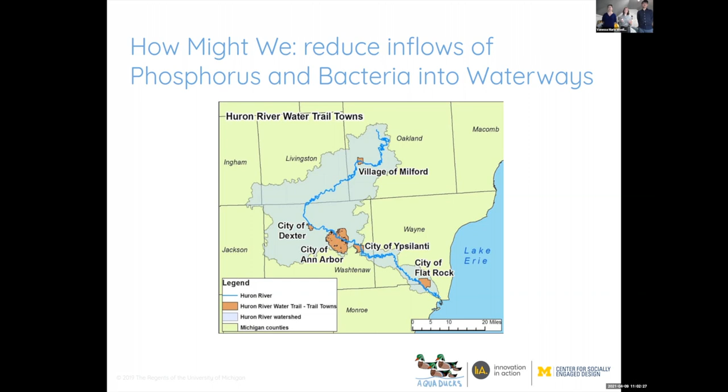Continuing to speak with our stakeholders, livery workers think the water is contaminated because they frequently have to shut down the business. Rowers don't want to be on the water if it isn't clean because they're on it so often, and it inhibits other recreational activities like fishing, swimming, and anything else that happens on the river.

There's also concerns from experts about long-term water quality, and fish experts are concerned about the river biome, and other experts as well, so people who are worried about birds, turtles, everything you like to see when you go to a river. There's also concerns about algal blooms as these nutrients flow into the river and get stagnated and cause big blooms and dead zones.

Moving on to a more community focused issue, parents wouldn't let their kids swim in this river because of concerns about safety. Downstream communities such as Ypsilanti distrust the safety of the water, and they feel like they're being cheated by Ann Arbor, who is a high socioeconomic class, moving it on to the lower socioeconomic class in Ypsilanti. It seems like Ann Arbor is making a problem for them.

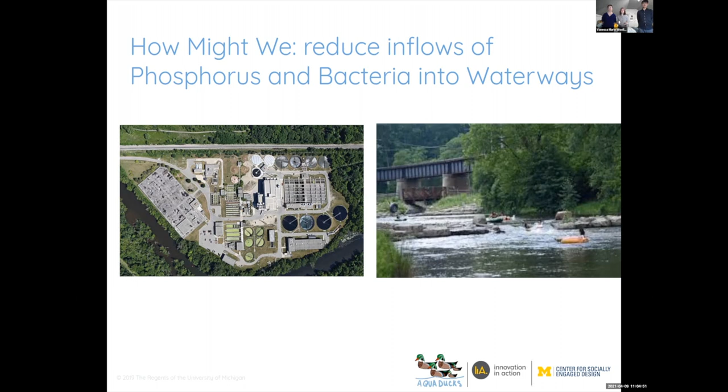So when these happen, it releases nutrients and E. coli into the water. E. coli is a huge disease-causing agent, and nutrients such as phosphorus and nitrogen cause algal blooms and disrupt the native biota. So we need a small solution for a huge problem.

Thank you, and I'll be talking about our solution. Our solution is called the Quality Water and Contamination Control Device, or QWACC for short. The idea is that it's an end-of-pipe solution, so you attach it to the end of the wastewater treatment plant just before water enters the river, and it processes any contaminated water that happens to get through.

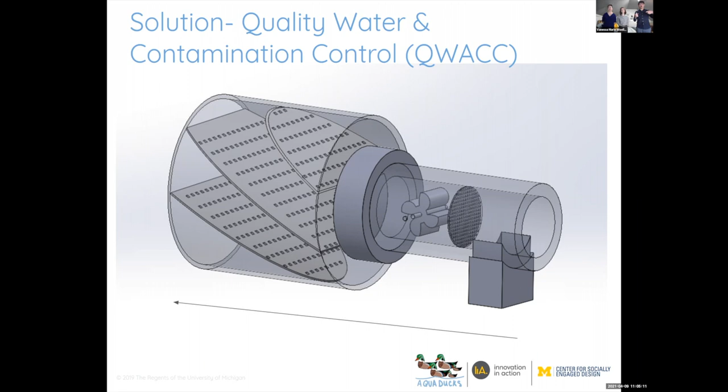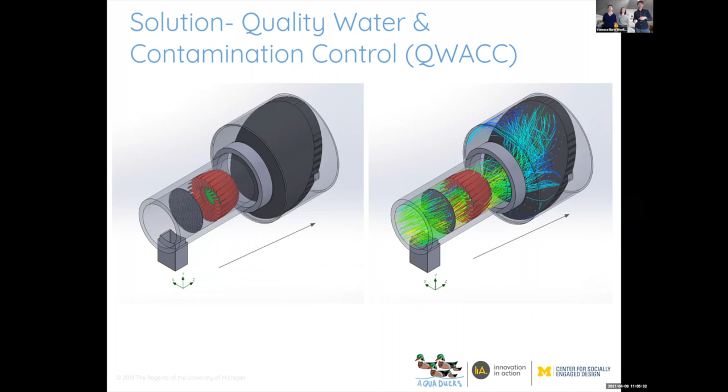This is our initial design, and we have a more updated design shown here. On the left is a CAD model of our design, and on the right is a flow model. You can see an arrow showing the direction that water flows from left to right. I'll be going through our device and how it treats the water step by step. First, we have a solid filter. This removes any solid debris that happens to get through.

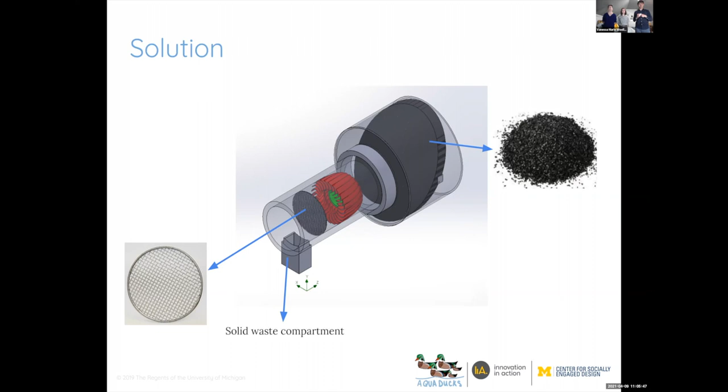There's a container at the bottom to catch any solid waste, making it easy to remove and clean for easy maintenance. This black portion is an activated carbon filter, which removes a large majority of the nutrients, heavy metals, and other contaminants that might get through.

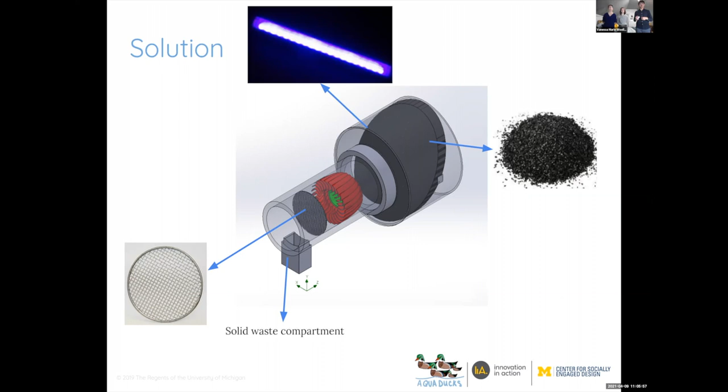We have a UV light surrounding the edge of that cylinder, which disinfects and kills any bacteria. We need to power this UV light, so we have solar panels and a turbine. The turbine generates electricity as water flows through the pipe, and the solar panel generates electricity from the sun.

So this device is completely self-sustainable and self-sustaining, and really low maintenance. It's easy to get in, install, and clean the device, which is helpful because the wastewater treatment plant is a super high energy consumption area. This will just go at the end of the pipe and treat any wastewater that happens to get through.

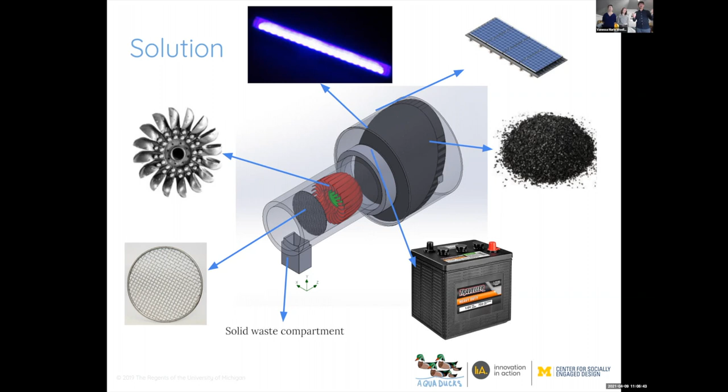We have to have a source of electricity storage, so we have a battery to store any electricity generated from the turbine and from the solar panels powering the UV light. So why are we the group to do this?

Vanessa and I, growing up in Ann Arbor, were always told by our parents not to swim in the river because it's generally dirty. The three of us are University of Michigan students, super integrated with our campus, and the Huron River runs right through it, central in the Arb. It's something we really want to upkeep and keep clean and healthy for everybody to enjoy.

Especially Vanessa and Rosalia, who are environmental engineering majors, so this is super close to their field.

The problem hasn't been addressed like this before because generally water is treated before it reaches the end of the pipe. But in this specific case of wastewater sewage overflows, contaminated water reaches the end of the pipe, and our solution is the first of its kind to address this problem.

This can actually be applied to other cities, not just Ann Arbor. Cities like Detroit or Chicago could also use this solution to help with sewage overflow situations, which happen very frequently.

In terms of next steps, after running these simulations we plan to do some physical testing. We're planning to work in a lab to perform tests on the filters to make sure they work, and also do some flow experiments to make sure flow happens as we expect.

Then we'll put all the parts together and test the device as a whole, to make sure everything works once it's integrated. Then we'll do some on-site testing. We've talked closely with the manager of the wastewater treatment plant and figured out ways we can test our device on-site to see if it actually helps them with this problem.

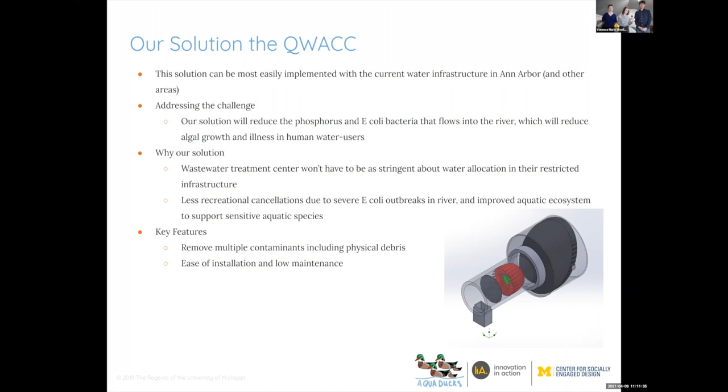That way it can go through quickly, and activated carbon works by having the most surface area so it'll adsorb the most it can. So you want them to be thin and have as much contact with the water as possible, which is why we chose to do small, thin layers as opposed to one thick one.

Okay, I'm trying to understand how it works. Do you want me to explain activated carbon a little bit? Sure. Okay, so a good metaphor for activated carbon filters is a sponge.

A sponge has a lot of pores in it - essentially a bunch of tunnels, so there's a very large surface area within this filter. When contaminants in the water pass through the filter, there are intermolecular forces, commonly called van der Waals forces, which attract and remove these contaminants from the water and stick them to the carbon. So we chose activated carbon specifically for its large surface area.

So we don't need as many filters to treat our large volume of water. Our specific design, we were planning on mixing it with coconut fibers to make it a more sustainable design. Additionally, activated charcoal filters can be regenerated.

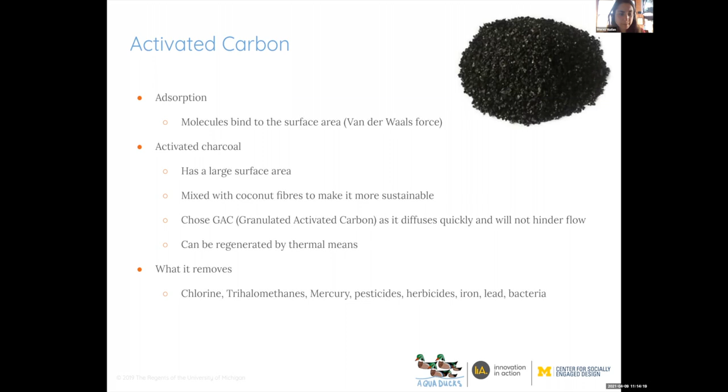Yeah, so we talked to a wide variety of stakeholders, mostly experts on the river. We talked to the manager of the wastewater treatment plant, the president of the Huron River Watershed Council, and a lot of professors who gave us information about what contaminants were really significant.

They told us what sources these contaminants were largely coming from, ways that we can treat it, and the practicality of our solution compared to other solutions before it. So we were able to look at what people have previously done and see that our solution is a lot more practical, cost effective, and sustainable. We also talked to the wastewater treatment plant manager several times, and we actually just met with him last week.

We pretty much gave him this presentation and said, this is our design. Would this work in your facility? And he said yes, this would work in your facility, and I think it would work in other facilities too. He gave us examples of other places where this could be implemented, and he seemed very excited about it. So it's definitely something they're open to at the wastewater treatment plant.

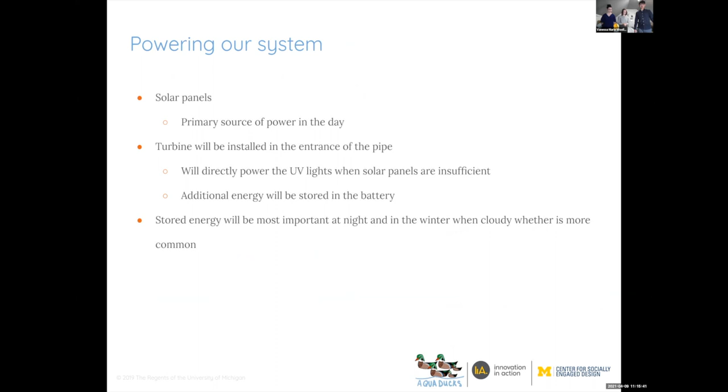Even if it's slightly more than this, it's significantly cheaper than having to replace any infrastructure, which municipalities don't even have enough funding to do. Regardless, even if this price was double, it would be way cheaper than having to deal with a sewage overflow event and replace all of the existing infrastructure to make up for these events. On the legal side, the city of Ann Arbor was fined over $40,000 last year due to repeated sewage overflows, so this solution can avoid that in the future.

On that note, have you been able to speak to city officials who have said that there's room in their budget to put towards prevention, and that they would be willing to pay for this?

We were hoping to start with funds from grants in order to put this pilot into the wastewater treatment plant, as opposed to having them invest in something that hasn't been tested yet. The wastewater treatment plant was open to it though - we asked, would you be willing to pay for something like this? And the manager said this is a good option for removing things we cannot handle on site, and it would be way less than paying a fine again. So they were definitely open, though we should definitely contact some city officials.

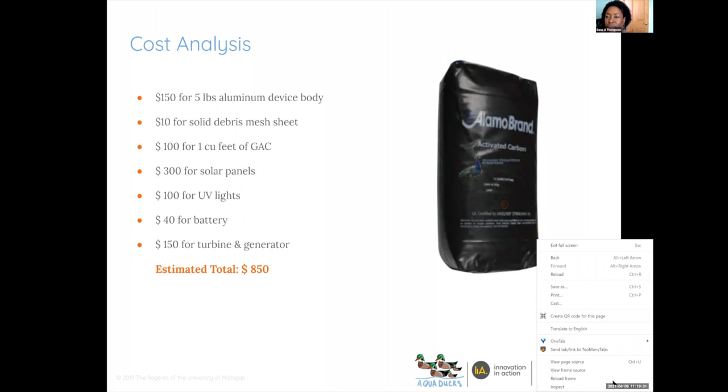Just one last question. Do you have an idea whether the filter would need to be designed differently for different bodies of water? So for the Detroit River or Chicago or other areas, would you need different components?

So all of the internal components would stay the same. I would say the only variation would be the size of the actual device, the cylinder, because other treatment facilities might have larger volumes of water coming in. So that is the only variable in these devices, I would say. Thank you.